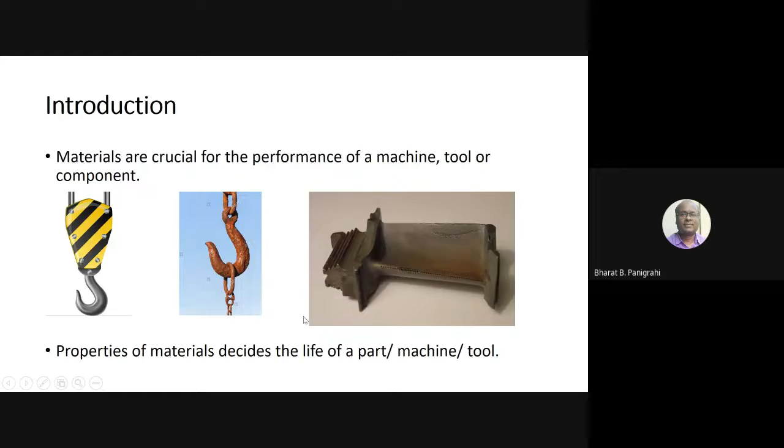You all know materials have different applications, and different applications require different kinds of properties. Not one single property is sufficient to meet all your requirements. Different functionality needs different types of characteristics of the material, and this difference in characteristic requirement leads to the development of a variety of novel methods of processing or novel materials. So high entropy alloys are one of this series which comes out.

When you talk about broad classification of materials, they can broadly be classified into three major categories: polymers, metals, and ceramics. When we talk about ceramics or polymers, each has its own properties that define its own application domain. Ceramics have definite properties - they are very hard, but they are not ductile. Polymers are typically soft and good for low temperature applications. Ceramics are good for high temperature applications; however, they will not have conductivity or ductility, which limits the application of ceramics.

Polymer properties being soft limits its application too. Similarly, when it comes to metals, they are ductile and conductive in nature. However, when exposed to high temperature, or exposed to an oxidative or corrosive atmosphere, we have issues. So when we talk about pure polymer based material, pure ceramic based material, or pure metal based material, each will have a different domain and area where it can be applied independently.

However, there are a variety of requirements where you also need high temperature resistance, oxidation resistance, but also need ductility. So you will have a requirement complex in nature. What happened then is that not one single category of material is made - so you develop something called a composite. You all know what a composite is, I need not explain it to you.

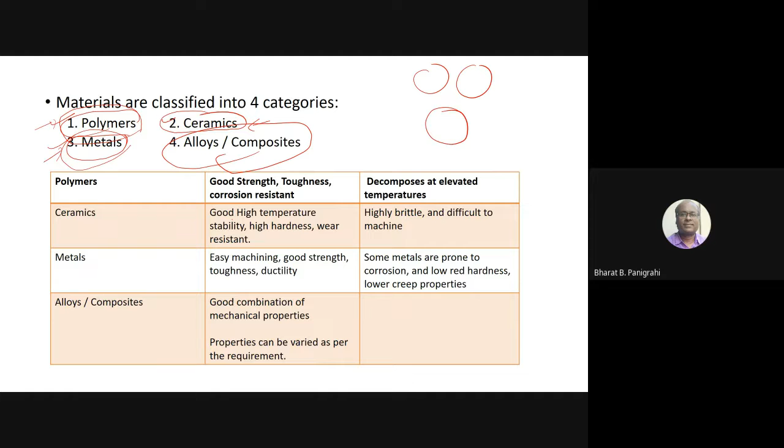So we will be discussing, within metal systems, a relatively new class of alloy which we call high entropy, which has come out here. Now, these are just like conventional alloys - they have a variety of properties and a variety of applications available.

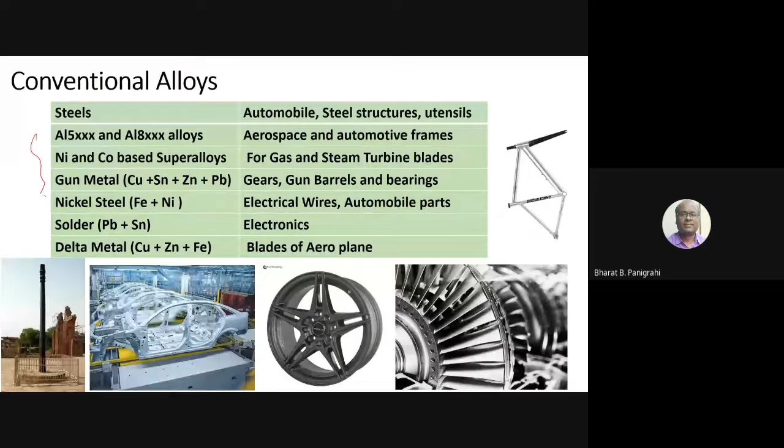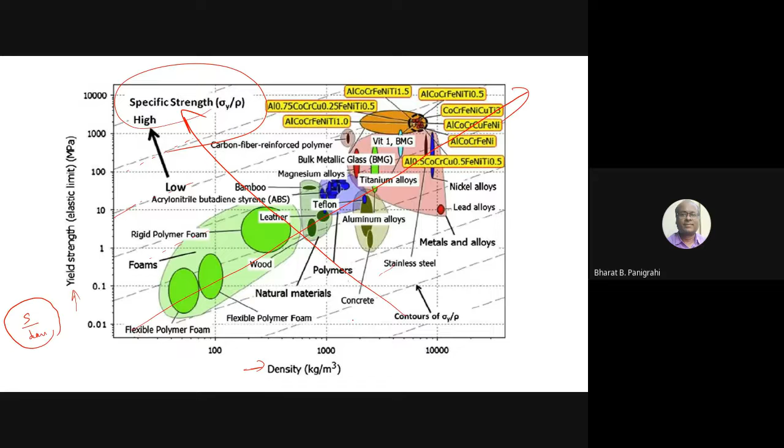So the demand for not only high strength material is high - of course you need high strength, but these days, especially for automotive or aerospace applications, you are not only looking for strength, but you want the weight of the material to be reduced. And that leads to a material property called high specific strength. So our actual requirement is going in this direction.

We want density to be low and strength to be high, which is not very easy to achieve. If you look at high entropy materials, these are a variety of materials - you can see polymer, foam, other things. What I want to say is all the conventional materials follow this trend.

The yellow portion, as you can see here, represents an upper portion of high specific strength. So high entropy alloys are typically a material with high specific strength. What it means is having a relatively lower density and a higher strength. This is where demand for them is increasing, so wherever you are looking for a high specific strength material, this is the class of material which can fill the gap.

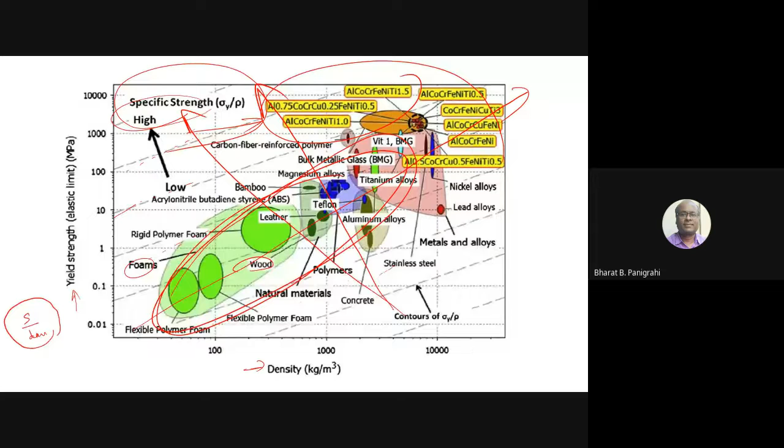There is a word used, entropy, and I don't want to bore you with it. These details of entropy will be covered by the next speaker when he does the thermodynamic modeling.

Whatever high entropy talks you will hear, most people will say there are a lot of elements you can add. However, most high entropy alloys you will find have somewhere around 4 to 7 to 8 elements, and you will see that their configuration entropy is very high. This is the class of material which we refer to as high entropy alloys.

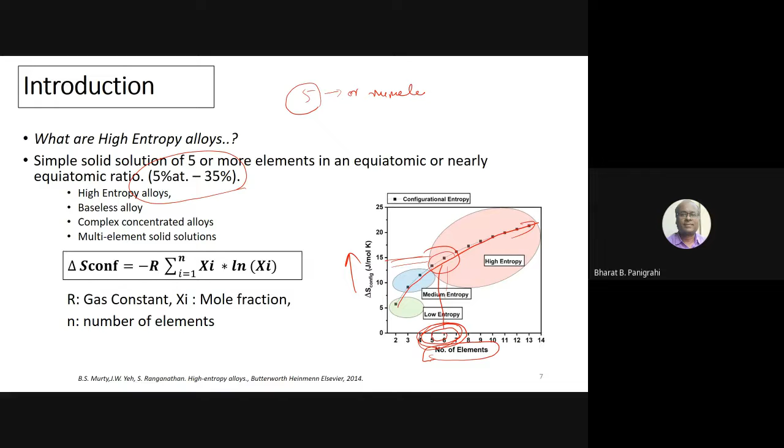So what does the alloy mean? We are having a variety of metals A, B, C, D, E - assume these are all metals. These metals are mixed together to make a single alloy, so it will have A, B, C, D, E in the alloy. This is our goal.

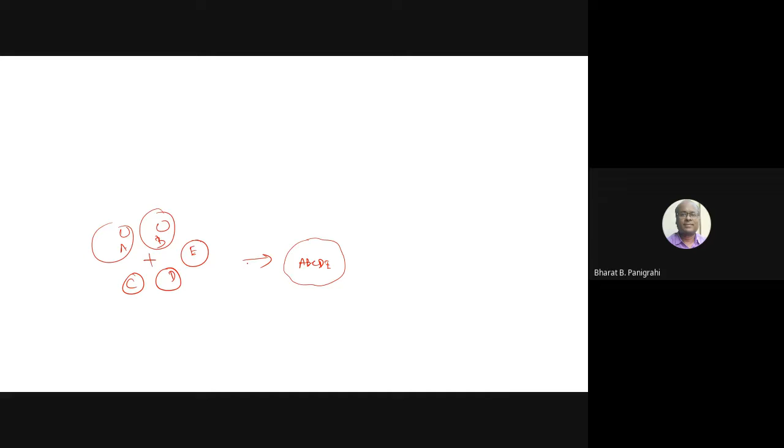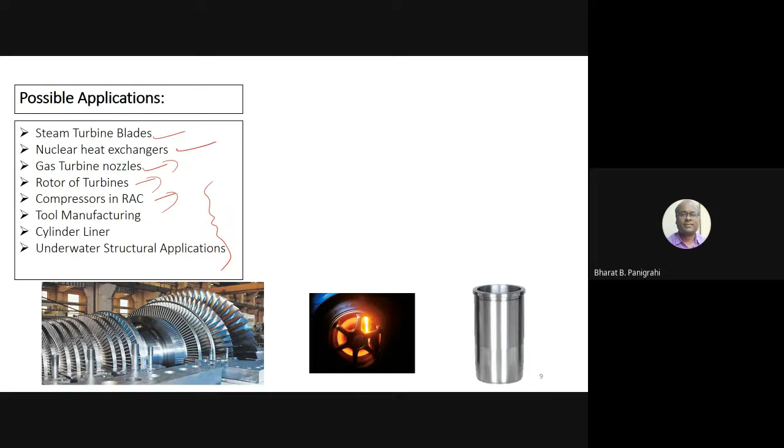There are a lot of applications you can find because they have very good hardness and good wear resistance, for example. Some high entropy alloys are also good in oxidation resistance. So you can find applications in a variety of areas - I've just listed a few, like turbine blades, heat exchangers, gas turbine nozzles, rotors, and a lot of other manufacturing applications. Since some high entropy alloys have good oxidation resistance as well as strength, they can also find application in underwater and structural applications.

There are a lot of desired properties, as I said. Not all high entropy alloys exhibit this, but there are a good number of high entropy alloys which give you good strength, good toughness, good corrosion resistance, good wear resistance, high recrystallization temperature, and controlled or low thermal expansion coefficient. So they can be used for several purposes.

However, in 2004 the actual breakthrough comes, and actual research in high entropy starts from a group led by Brian Cantor, which is in the UK, and another group led by Professor Yeh from Taiwan. In 2004, they published a paper independently, and from there the major attention across the globe comes from 2004 onwards. So this material is now almost close to 16 years old - it's a teenager. So there are a lot of scopes when materials are in their teenage years, huge scopes for anyone who is interested.

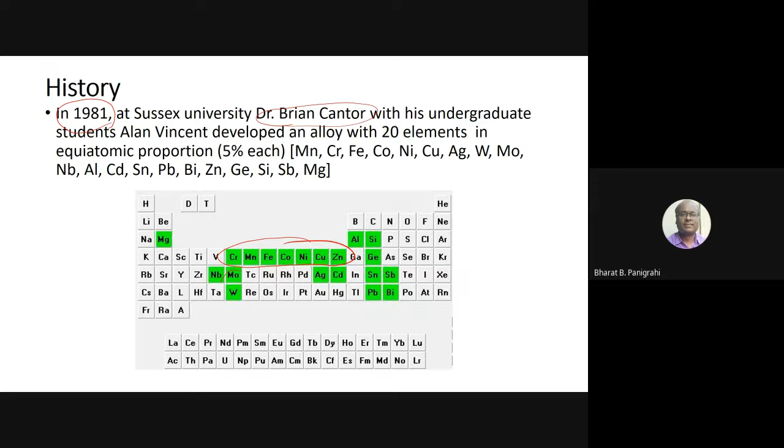If you look at the typical characteristics, there are 4 core effects that have been defined for this material. The first is called high configurational entropy - as I mentioned, if you are adding more and more elements, the configuration entropy increases. Since you are having elements of different atomic sizes, there is also what is called lattice distortion.

Lattice distortion means that now you are adding 5 elements and each element has a different atomic size. You can compare the size of A to the size of E, or to the size of B. Whenever you have a lattice, let's say this is a cubic structure. If it is ideal, everything is the same size, and you will see a very ideal cubic structure. But the moment you change the size at each corner, you will see there is a distortion on the crystal lattice. The next one is called sluggish diffusion.

This particular group is a little controversial. People have a lot of different opinions when it comes to diffusion. However, it shows sluggish diffusion. Typically, the reason people believe this material behaves as sluggish diffusion is that whenever you heat a material at high temperature, normally you see huge grain growth. All normal steels, alloys, titanium alloys, doesn't matter - at high temperature you will see huge grain growth. But in high entropy alloys, you will not see grain growth, or you will see extremely slow grain growth. That leads people to believe their diffusion is very sluggish, meaning slow. Where diffusion is high, you may expect high grain growth.

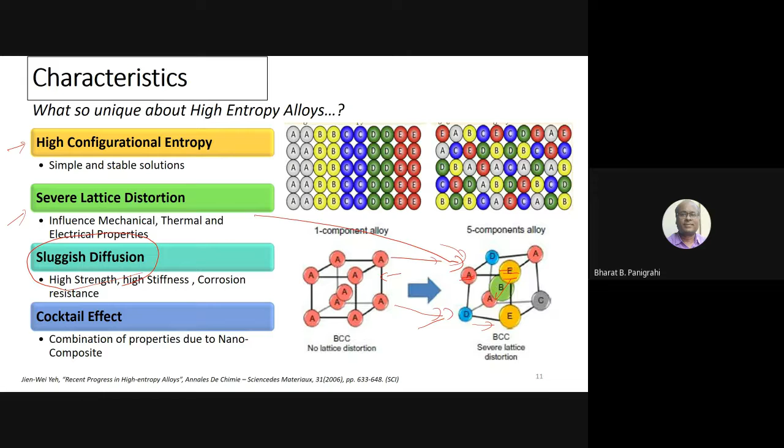There is something called the cocktail effect. This cocktail is a combination of various metals - A, B, C, D, whichever metal you want. Probably the combination of different properties coming from different materials can add up or exhibit multiple properties in one single alloy. So this is called the cocktail effect.

There are a lot of thermodynamic aspects involved. I am not going into that - just leave it.

When it comes to fabrication, it can be fabricated through the conventional route. The conventional route is basically the melting and casting route. You are well familiar with this - everybody is familiar with what melting route and casting route mean.

You can have a powder metallurgy route where metals are converted into fine powder. You prepare alloy powder followed by sintering. So it has powder, compaction, and followed by sintering, and this gives you the properties. We have a variety of sintering methods, and similarly we have a variety of melting and casting methods.

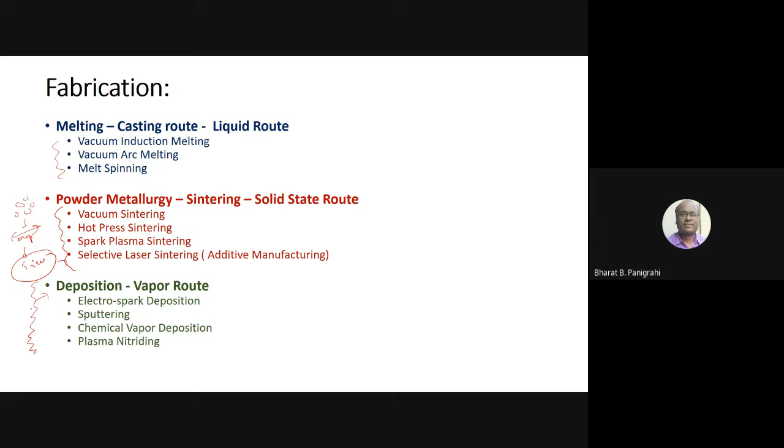This can also be used through the deposition method, which we discussed earlier, but there may be other deposition techniques. Material can also be synthesized as thin layers and coatings. By using alloy combinations, you can have a coated layer in the form of an alloy. So all three routes - melting/casting route, powder metallurgy route, and coating or deposition routes - are possible to synthesize this material or produce this particular group of alloys.

A typical powder metallurgy route consists of stages. Now I will talk a little more on the PM route, as I discussed earlier. For those not familiar with powder metallurgy, let me brief you. The powder metallurgy process consists of three stages. Those who are familiar, kindly excuse me, but there is a possibility people may come from different disciplines. The first step is making the powder.

Then the next stage is compaction and shaping. There is something called compaction, also referred to as shaping of the preform or component. The third step is called sintering, where the material actually gets its strength. So powder metallurgy has three different stages: powder making, then compaction and shaping, and the third stage is sintering.

In the present case, powder can be prepared through various techniques. You may be familiar with atomization techniques, and there is another technique called mechanical alloying process. For high entropy alloys, what we do mostly, and most reported powders are prepared through the process called mechanical alloying.

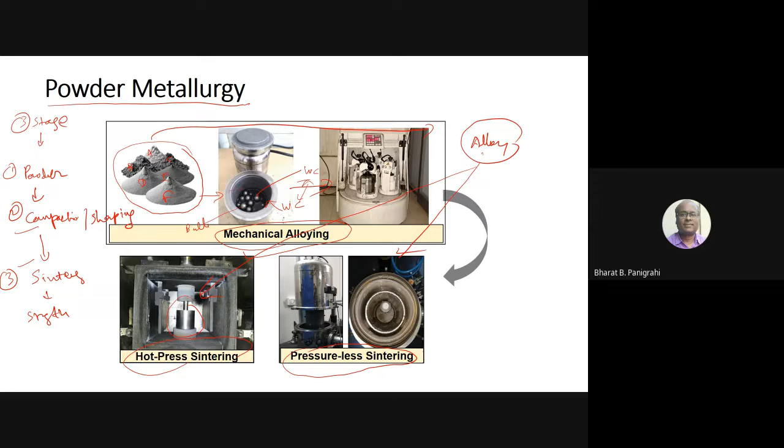We involved both kinds of process here. Both has their own advantages and disadvantages depending on what kind of component you are producing. Process can be taken. So this is brief about production of the high entropy alloy powder, which our lab basically involves a mechanical alloying route for making the alloy powder.

We work on a variety of high entropy alloys, not only one composition. There are different aspects of work when we talk about high entropy alloys. One is understanding the diffusion and densification mechanism. Understanding diffusion mechanism is a very big thing, because we have a large number of elements. We need to understand how the diffusion of atoms is taking place.

Then how to achieve high density. For making a component, you need to achieve high density. There are different ways we try to evolve. Not all powders are good in sintering. Let me be honest, you need to really optimize the process. You find ways how you can enhance the densification. Enhanced densification means how you can reduce the porosity or defects inside the component, so that mechanical properties can be better and better.

So that is one aspect, purely on how to enhance the densification, which can be done through solid state sintering as well as liquid state sintering. So we also employ both techniques, called solid state as well as liquid phase sintering, to get a much denser microstructure.

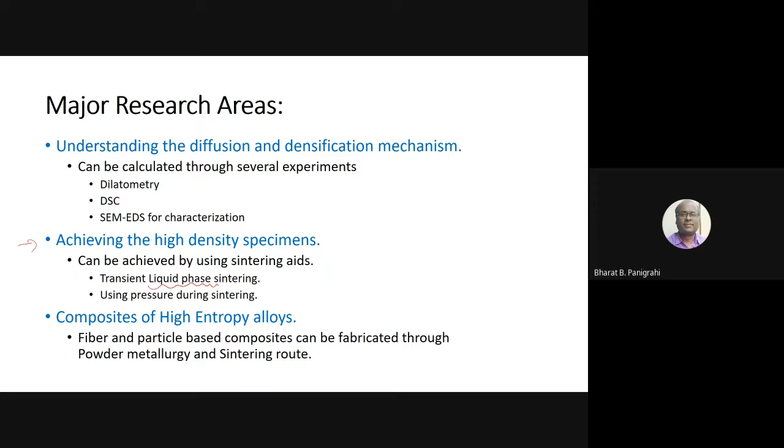Third aspect is what we are dealing with here: making a composite of high entropy alloy. Using a composite, we use high entropy alloy as one of the phases in the form of matrix. In another case, we are also using it as a reinforcement. So these are three major aspects which we are working on: development of alloy and understanding the diffusion behavior, achieving high density, and of course talking about their properties evolution, all sorts of mechanical properties. And the third one is trying to develop some composites based on high entropy alloys.

I'll just tell you an example how you can achieve high density through pressureless sintering, in this particular composition of high entropy alloy, which is a 5-element equiatomic alloy, where we have aluminum, cobalt, chromium, iron, and nickel. These are the constituent elements of that alloy, which is 5-element in equal atomic compositions. This alloy is prepared through the mechanical alloying route, and after the alloy is prepared, we study their chemical behavior and phase evolution.

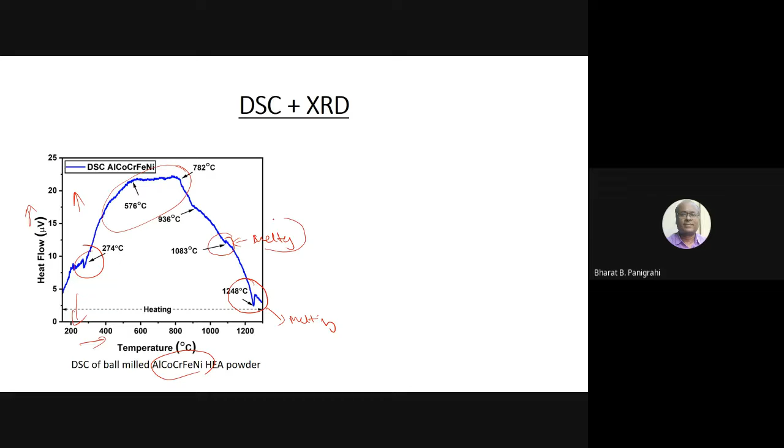Similarly, here also you will find certain endothermic peaks. That means some fraction of alloy is actually melting. So all the melting peaks come in the form of endothermic peaks.

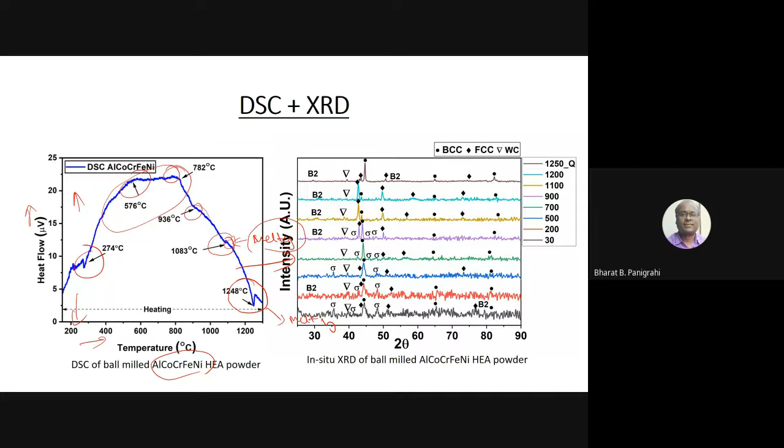We have taken some values, and you can see the changing diffraction profile and phases as you move from bottom to top - there is a huge, gradual change in diffraction profiles. Whenever a gradual change in diffraction profile is happening, it indicates a slight change in the phase composition.

I'm not going into detail of each peak. What I want to bring to notice is that with changing temperature, the phases are changing - new phases are forming, some phases are vanishing, some new precipitates are forming. You can characterize all this using X-ray diffraction, and see the corresponding signal at various temperatures using the DSC.

There is another technique called dilatometer, which essentially tells you that as you keep heating the sample, you will see a huge shrinkage here - this is the sample. You do the compact. Dilatometry is used for thermal expansion measurement. So you have a powder which you make into a compact, or pellet, and when you heat this pellet, the material undergoes expansion and shrinkage.

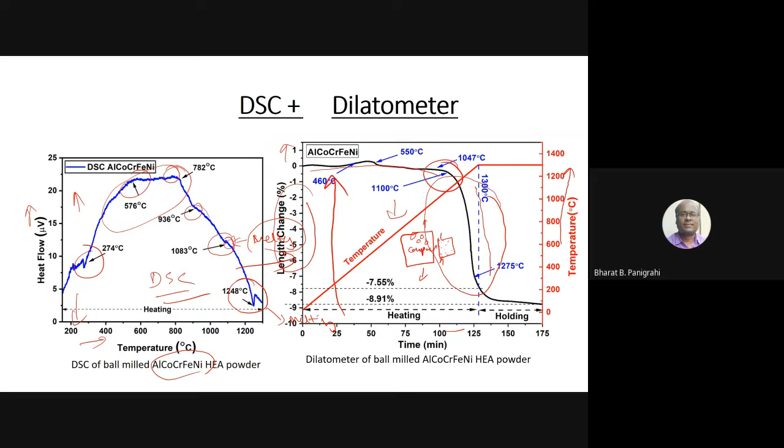If the material has to be sintered, that means you are going to see shrinkage. Sintering leads to shrinkage. When the green compact is heated, you will see that at a temperature of approximately 1047 degrees or 1045 degrees centigrade, the shrinkage occurs - this is the length change. The y-axis is the length change, downside is shrinkage, upside is expansion. This is the region where you see huge shrinkage happening, meaning major sintering of the material is happening in this particular temperature range.

I'll show a little more detail. If you overlap DSC and dilatometer - this is the DSC profile, this is the dilatometer - you can notice the events: small melting, large melting. You can see that when the melting starts, the shrinkage also starts. This tells us that this particular alloy undergoes liquid phase sintering - the moment liquid is formed, densification kicks in. This proves that this particular alloy actually goes through liquid phase sintering.

If you look at the microstructure - since we're more interested in microstructure, as I mentioned earlier - you quench the material after heating it to a certain temperature. Whenever you quench at different temperatures, let's say around 800 degrees centigrade, you can see the grains are unsintered - very clearly grains are there. But if you heat it to a high temperature, around 1200 degrees centigrade, you will see these grains, and the white phases you see are basically an indication of wetting of the surface by the liquid phase. It's like something dipped in liquid, and after dipping you will see the liquid is there - you can very clearly see the liquid has been quenched.

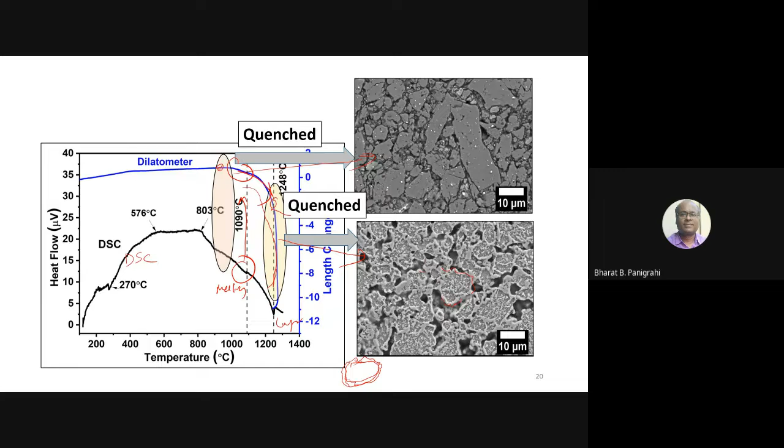When you quench it, it is frozen as it is, and you can see around the grains, liquid droplets have frozen on the surface. So the grains are wetted by whatever small portion of liquid is formed. You are actually able to capture the liquid phase here. So it says that liquid started forming at that particular temperature, and when you allow proper time, this leads to massive densification.

These are different temperatures. You have quenched the material at 800 degrees Celsius, and you can see pure, no sintering at all. At 1000 degrees, there is a little bit of sintering, grain coarsening, everything. But at 1200 degrees centigrade, you will see that some fraction where liquid started forming.

This is a quenched sample, just when liquid started forming. The white spot you see is the region where liquid starts. You can see that hazy structure when the liquid phase appears. At high temperature, you can see very clearly at 1250 degrees that a good amount of liquid is formed and has wetted all the grains.

So you can actually capture this event by looking at what is happening in the shrinkage side by dilatometer, what is happening in the thermal profile in the DSC, and what it exactly looks like you can see in the SEM. So SEM, DSC, dilatometer, and XRD can together tell the complete history of the changes happening in your alloy.

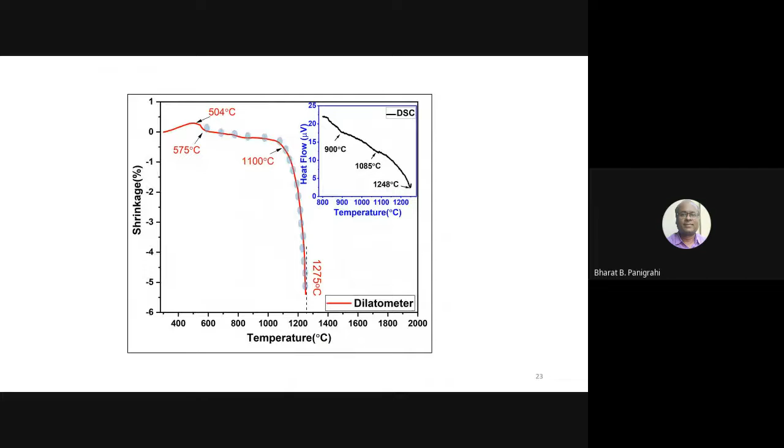Okay, so this I have already explained. To understand further, which may not be of much interest to you, there is something called kinetics of shrinkage. So kinetics of shrinkage involves a lot of modeling we do.

What we basically do, when we talk about sintering kinetics, is try to identify which particular diffusion mechanism or sintering mechanism is acting for densification. There are a variety of sintering mechanisms, as you all know. In this case, I have shown that this particular alloy has a liquid phase forming. So liquid phase forming means the viscosity of the liquid which has formed plays a huge role. To understand that, we have characterized the viscosity of various elements.

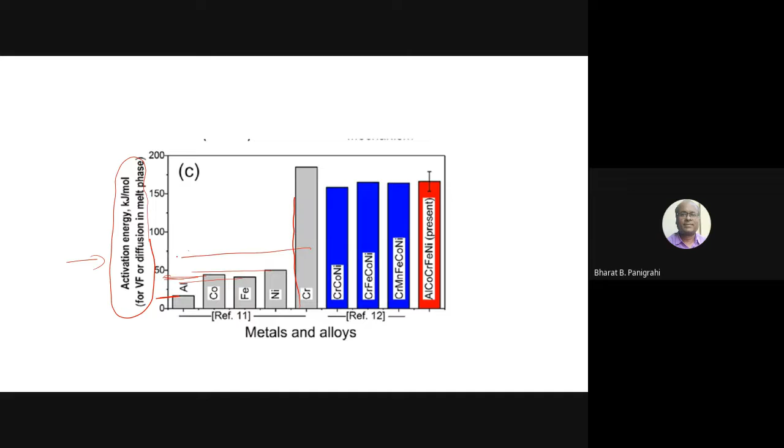Some of this data has been taken from literature. This is the coefficient of viscosity, activation energy for viscosity. For aluminum, if it is liquid aluminum, this is the viscosity value. If it is liquid cobalt, just at the melting point of the metal, these are the viscosity levels. For chromium, if you have the pure element as a liquid phase, it has a coefficient of viscosity with activation energy somewhere here. These are the three blue lines.

What you see here is for the high entropy alloy, when it forms near its melting point, it has viscosity in this range, and its activation energy of viscosity is in this range. And in our alloy, shown in red, when you measure the coefficient of viscosity, it exhibits activation energy in the same range. This confirms that whatever phases we are predicting, the liquid phase which has formed has a coefficient of viscosity exhibiting the activation energy reported for this high entropy alloy. So this is another way of confirming liquid phase sintering in our alloy, where the viscosity of our alloy and the reported alloy are nearly in the same range compared to their base element.

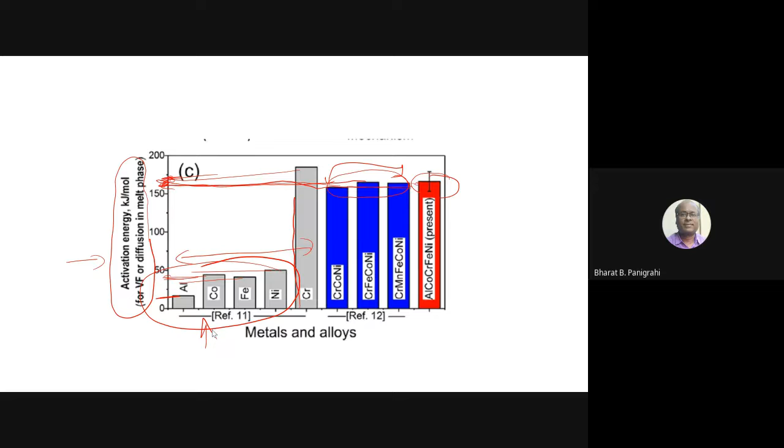The base element has much lower viscosity. So this does indicate that this alloy is melting as a whole and forming a liquid which has a viscosity altogether completely different compared to its base element. This also gives a very important conclusion about the viscosity of the alloy phase versus the viscosity of the independent element.

There are a few more things. We have some other alloys, for example another composition containing silicon. What we are doing is, silicon is extremely hard and has very high strength. However, it doesn't have ductility. The problem is, our goal was basically to improve ductility while exploiting the strength of this material.

So basically what we wanted here is to take this particular alloy and use a soft phase to provide ductility. Here we have used pure nickel as the soft phase, which is expected to provide ductility, while strength comes from the high entropy alloy phase. So this is basically a two-phase mixture we are designing so that you can have both high strength as well as ductility. You will see the properties. This is a typical powder metallurgy route, nothing wrong in that.

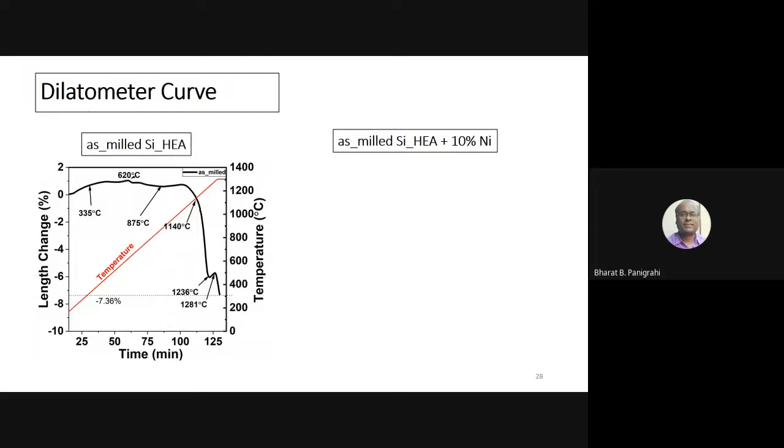These are their typical profiles, so you need not worry about that. The most important part I want to show is the density. We have a pure high entropy alloy, silicon high entropy alloy, and we've added 5% nickel powder in one case and 10% nickel powder in another. We compacted and sintered them, and their sinter density is more or less in the same range of 96 to 97%.

When you look at their hardness, since nickel is a softer phase, you might expect a change, but the hardness does not change drastically because the base alloy is already a harder phase. The hardness is retained without really compromising it.

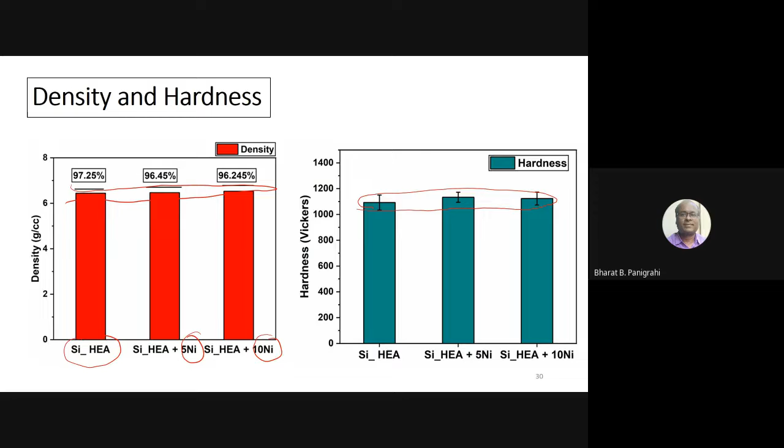But if you add 5% nickel, we are able to jump the strength to almost close to 3. By having 10% nickel, we have crossed the strength to 3 gigapascal, 3000 megapascal strength. You can imagine how you can tailor this material to design an ultra high strength material. You can call 3 GPa strength ultra high strength material—it's very rare to get a material with that kind of strength.

So what we are doing here is simple: you have an alloy made through mechanical alloying, which gives a nanocrystalline structure. This nanocrystalline structure has very high strength and very high hardness. By adding nickel, we are providing a softer matrix. So there is a combination of high strength phase and soft matrix, which has led to a massive combination for designing a material with ultra high strength.

You can see the strength reaches 3 gigapascal—you will never find such high strength in an alloy normally, it's very difficult to find. So what I'm trying to say is such alloys have extremely huge application or scope where you can design a high strength material.

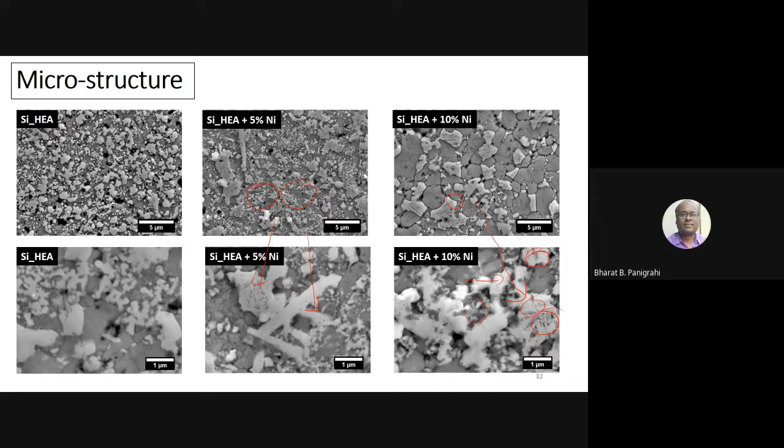These are simple microstructures. If you gradually increase the magnification, at high resolution you can see a lot of fine structures are formed. By adding the nickel, a huge amount of fine structure forms. Under the microscope, you have huge lamellar, needle, and fibrous structures. This formation of fibrous structure and fine needles—basically nano needles, you can call them nanorods—huge amounts of these nanorods and fibrous structures have led to a massive jump in strength. It's a very simple technique, but very effective for designing an alloy with very high strength.

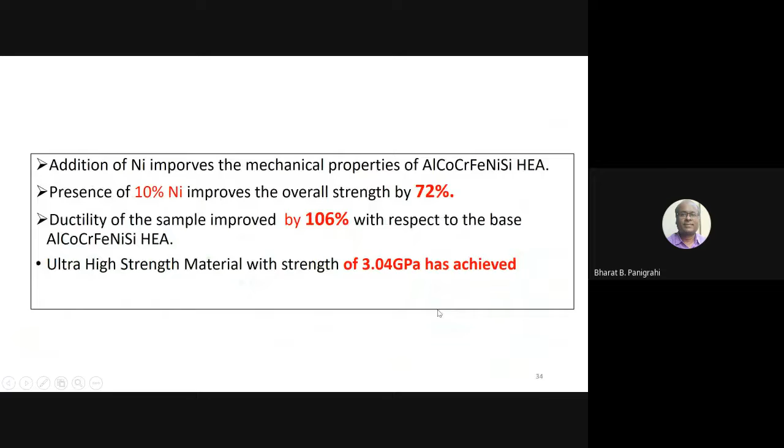These are more details anyway—chemical analysis. So what we want to say here is we have designed an alloy with very high strength.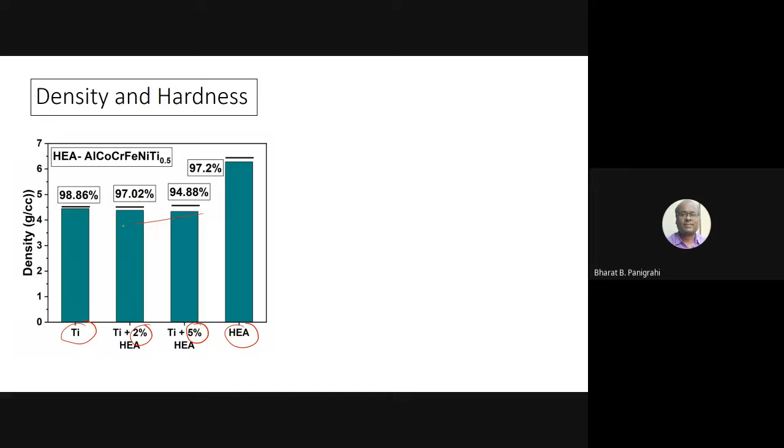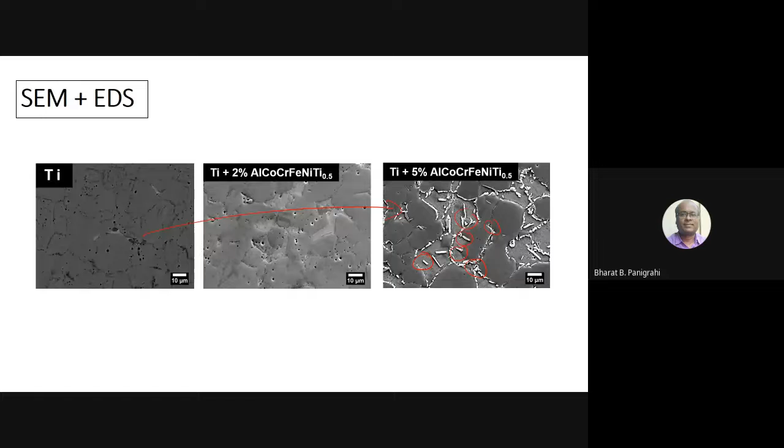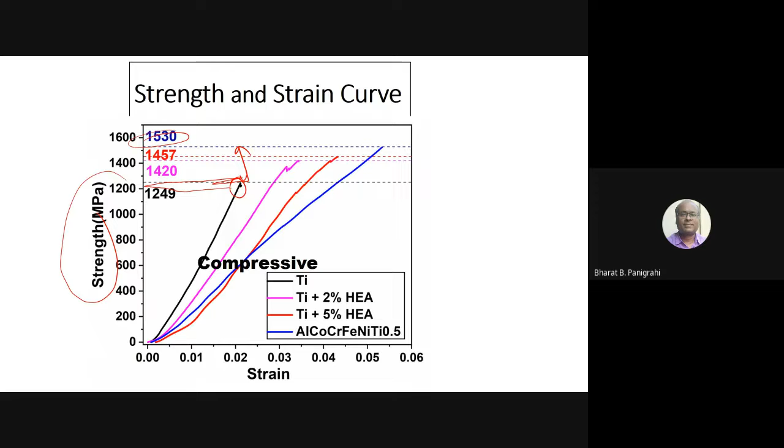Okay, we go for detailed analysis. If you look at compressive strength, there is a gradual change in it. The compressive strength of pure titanium is somewhere close to 1200, but this can jump to almost 1500 MPa by using the high entropy phase. So there is a massive jump from 1200 to 1500 megapascal by using just a small quantity, 2 to 5%, of high entropy alloy. So these alloys can also be used. If we increase this composition, the property will probably jump further. We just wanted to show that even a small fraction of such high entropy alloy can end up giving a high strength material. This is a case study of titanium, for example.

Apart from that, when it comes to high entropy, various categories of high entropy materials have come up. High entropy has led to categories called high entropy nitrides, high entropy oxides, and similarly high entropy borides. So a variety of high entropy ceramics has come into the picture, and these are extremely hard and very high temperature materials. This tells us that this category of material, high entropy ceramics, can replace conventional ceramics and oxides for many high-end or extreme environment material requirements.

So with that, I want to tell you that high entropy alloy material is extremely useful. It has been coming out for hardly 20 years, so huge scope is there in all aspects of material development: melting route, casting route, powder metallurgy route, deposition route. When it comes to properties, a lot has yet to be evaluated. Their fatigue behavior is not well understood, their creep behavior is not well understood. Whatever studies are available are very limited, and those who are interested can find huge scope in this material to work on. There's a lot still to dig up, and as people across the globe are working on it, I'm sure you will find a lot of interesting things coming out in high entropy alloys.

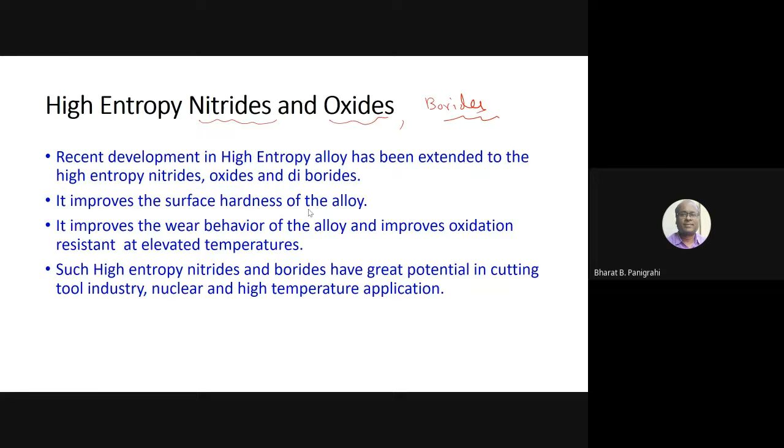Ravi Shankar sir, you can ask the question, sir. Yeah, directly. Ravi Shankar sir. Ravi Shankar sir. Yeah. Am I audible? Voice is not clear, sir.

Yeah, I just want to know what will be the price of the equipment. Pardon? I am not able to understand. Yes, I would like to know the price of this, you mentioned, for the dilatometer. So I would just like to know. Are you talking about equipment price? Wait a second, you have to type. Let me check. No, I can't see. You are talking about the price of a dilatometer equipment, or the price of a running cost?

So price of equipment varies, two aspects are there, sir. One is the temperature, which will decide... there is a huge disturbance, I don't know from where it is coming. Ravi Shankar sir, there was a disturbance in your voice. Ravi, can you mute? Sir, I understood the question. Can you mute? Yeah, can you mute? I can answer. Can you mute?

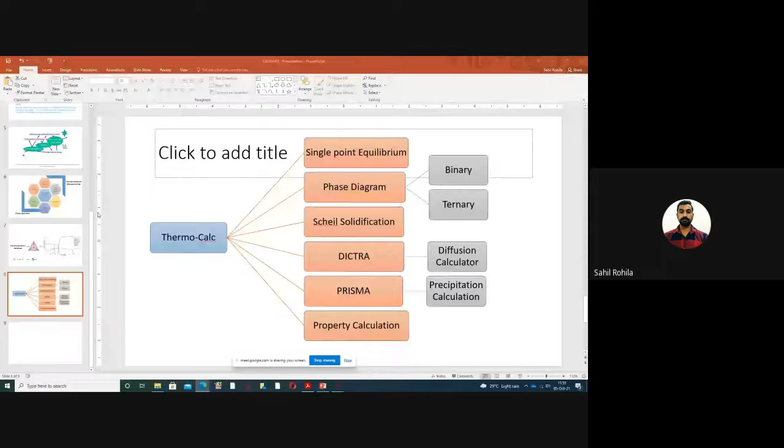Okay, thank you. So I am Dr. Sahil Rohila. I have just recently completed my PhD under the supervision of Dr. Bharat Bhushan Panigrahi at IIT Hyderabad. So today I'll be showing the CALPHAD techniques and Thermo-Calc for high entropy alloys, which are both recently new techniques.

The CALPHAD technique is new, and high entropy alloys as a technique is also new, so it has a really great future. If any student would like to pursue this, I request that they pay attention, and if anyone has any question, they can interrupt me anytime. Okay, let's start.

As one of you asked, how do you get to know regarding the phases, FCC or BCC? If we move through experimental techniques, there are several experiments we have to perform, such as XRD, TEM, and diffraction, to understand whether the phases are FCC or BCC. But now, using computational techniques, first we can decide which phase we want, and depending upon that phase, we can select the composition, and then go into fabrication of the alloy. That actually saves much effort.

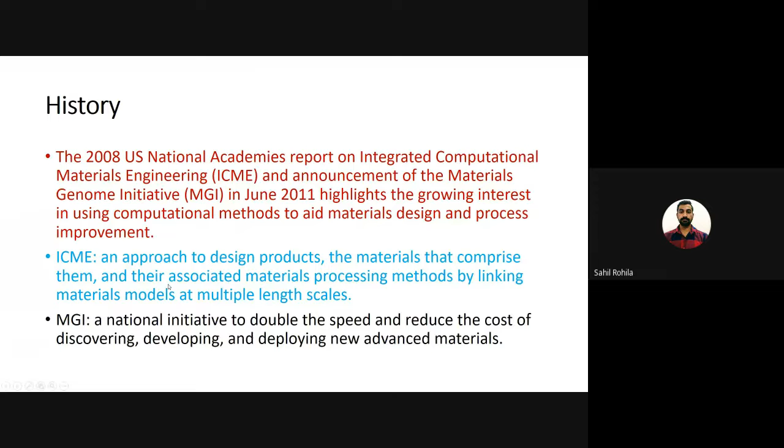So, history of this CALPHAD technique: it just recently started in 2008 by the US National Academies. They reported on the Integrated Computational Materials Engineering and announced the Materials Genome Initiative in 2011. These are just the definitions of what exactly ICME and MGI do. So, CALPHAD is actually an initiative of MGI and ICME only.

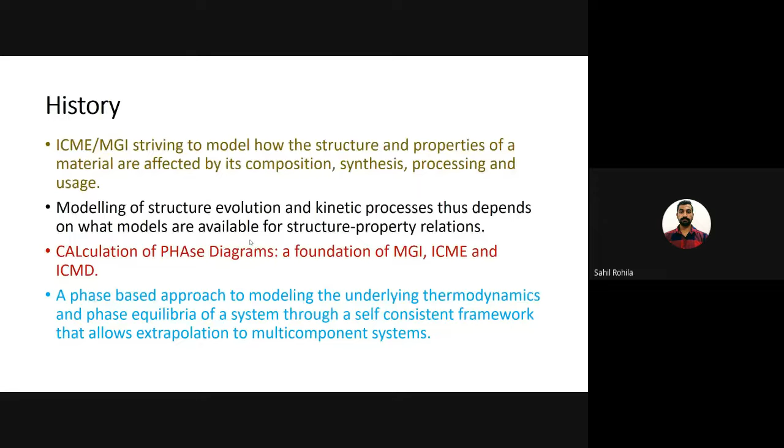CALPHAD is calculation of phase diagrams, and calculation of the phase diagram can be done through various ways, through molecular dynamics, Monte Carlo methods, and other methodologies. And Thermo-Calc is one of the software which actually provides easier help to follow.

So now these are the basics of the simulations. First, we do the first principle calculation. First principle calculations are calculations based upon mass, charge, or electron spin. We get to know the position of the electrons, how they are behaving, what kind of spins they have, and how their bonding will be. These are the first principle calculations, which are the base of all simulation and computational techniques.

Then it comes to the higher scale, that is CALPHAD. In CALPHAD, we get to know how different molecules are behaving with each other. If we are forcing, for example, aluminium and scandium together, how they will behave, how they will form like BCC, FCC, or Laves phase. That is CALPHAD, the higher version from first principle calculation in the length scale.

Then the next version, if we move forward, is the phase field methodology. Then our area also gets bigger. For a bigger size area, we get to understand how the minimization of energy happens, how entropy and enthalpy will behave, and how precipitations will occur. That we get to know from the phase field methodologies. And the next step is using the finite element methodology.

Above phase field, this is finite element methods, where we can get to know about the failures, how the materials is failing if we put some kind of pressure on it or give different types of loading. So this is how the computation starts from the very low scale to the higher scale.

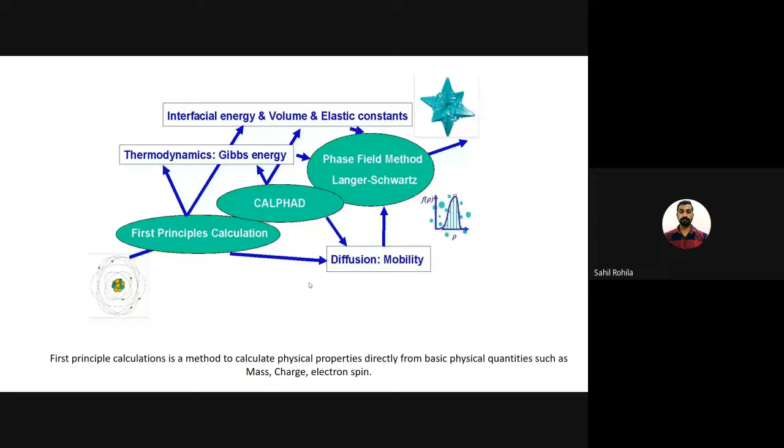First principle calculations, CALPHAD, phase field modeling which consists of Monte Carlo or other methodologies, and then ANSYS and Abaqus we usually use for finite element methodologies. So these are the main things which ThermoCalc provides.

ThermoCalc actually works on the minimization of Gibbs free energy, which is a function of x, the molar fraction, T is the temperature, P is the pressure, and N is the number of elements. So in this we can do two types of major calculations.

One is thermochemical measurements, in which we can calculate the enthalpy of formation, entropy at any time, heat capacity such as specific heat capacity, Cp and Cv, and activity. The other thing we can perform is phase equilibria, to get to know the liquidus temperature, solidus temperature, and how many phases are stable at a particular time.

ThermoCalc has a thermodynamic database, which is based upon experiments performed in the past. It consists of all the results from those experiments, and then we use ThermoCalc, which extrapolates using that thermodynamic database.

For example, point A is there, B is there, and D is there, but point C is unknown. So ThermoCalc has the database of points A, B, and D. Based on that, it will extrapolate and get to know point C. This is the very basic principle of how ThermoCalc exactly works.

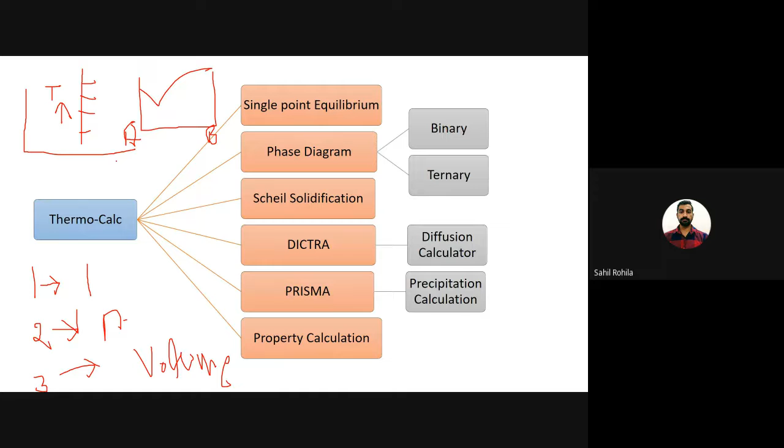But if the number of elements exceeds 3, how can we process those things? In that case, we actually make a pseudo binary phase diagram. For example, we have elements A, B, C, D, and E. So how do we obtain the phase diagram now? Because it is very difficult, what we will do is fix the composition of 3 elements at a point and make a pseudo binary phase diagram.

That's A and B, while C, D, E are fixed or constant. Then A and C, A and D, similarly A and E. We'll actually make phase diagrams of all the possible elements and then combine the results and get the data. Just similarly B and C, B and D, B and E. So these are the phase diagrams that we can make through ThermoCalc.

The other is the Scheil solidification. Scheil solidification is based upon the Scheil equation, so it uses the same approximations and assumptions while computing the solidification.

Another module of ThermoCalc is DICTRA, which is for diffusion calculation. For example, take the iron carbon diagram, or any case you can think of. In case of iron carbon, I want to see how things change if temperature is stable. Say I give it a 300 hour time frame - how will the carbon or ferrite boundary change with time? That we can process through DICTRA.

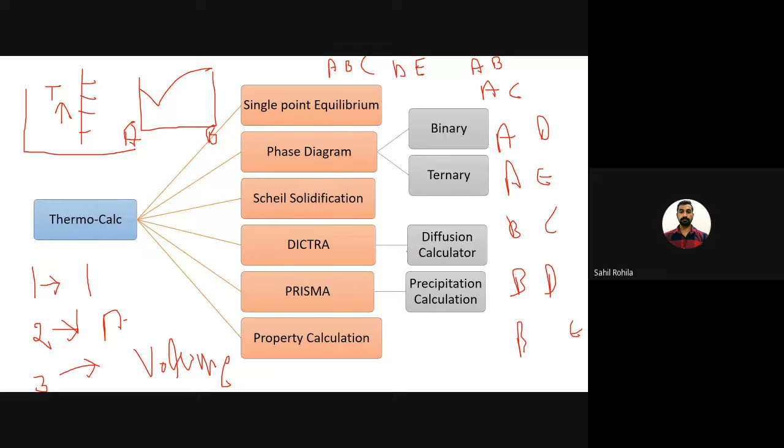The other is property calculation. Property calculation is something we can actually obtain from all of this. So we'll see now.

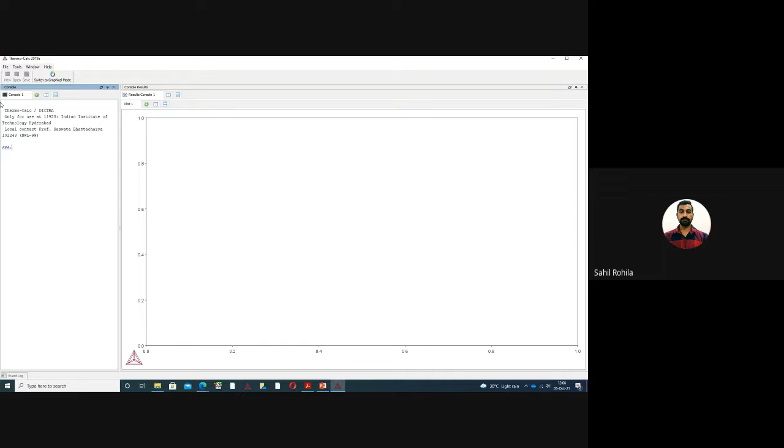ThermoCalc provides two basic modules. One is the graphical module, the graphical user interface, GUI. The other is the console mode. In console mode, we have to write programming code, just like Python, and we can import that code into MATLAB to use the results obtained through ThermoCalc with our own manual user-defined functions. So I'll use the graphical user interface so that you can observe clearly.

So let's start from the very basic - the single point equilibrium. Okay, so now you can see the configuration pane has changed. A periodic table has appeared here, and we'll see what type of calculation we can do.

First I'll do a calculation for a 2D binary alloy, and later I'll expand it to a high entropy alloy. For example, just as I explained in the first slide, we have to select the database first. It uses an experimentally available database.

So I'm using this iron carbon database only right now - I have already selected iron and carbon. Here in this pane, I can give input based on mass percent, mole percent, mass fraction, or mole fraction. I will prefer inputs from you actually, so if anybody can unmute the mic. Right now I'll go for mole percent.

So please let me know how much carbon you want in the alloy. 5%? Okay, let's go for 5%.

So on the next page, I have to select the temperature. What temperature shall I select? At what temperature do you want exactly the equilibrium condition? 980 degrees centigrade. Okay, 980 degrees Celsius, very good. Now I'll just go with perform tree.

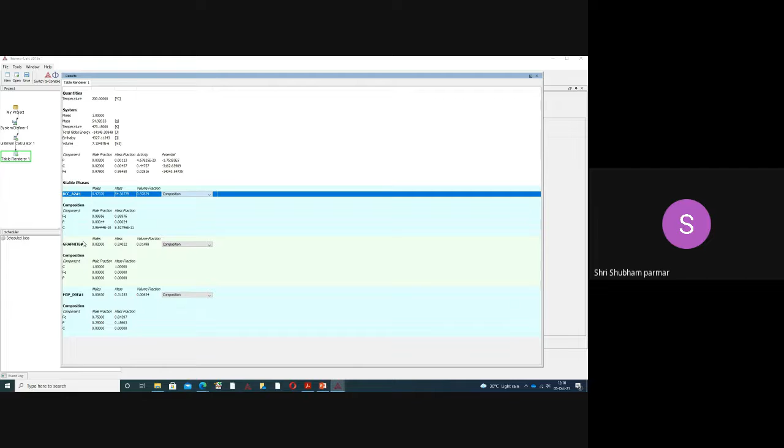Yes sir, so graphite. It is showing now graphite. But have you ever seen graphite in the iron carbon diagram?

Because it is cast iron, so here graphite may be there, no? Yeah, but mostly graphite is unavailable. Very less amount of graphite, yes, sometimes present. But cementite is the thing, that ferrite... cementite, actually, yes, we need cementite, and we observe cementite a lot in this iron carbon diagram and the steels.

Excuse me sir, but the carbon, what percentage have you taken? It is representing the cast iron. Exactly, 5% carbon you have taken. So carbon contains the graphite. Yes sir, right now the carbon percentage is 2. So let's even make it 0.5. Will that be fine? That will be fine.

Still we are observing graphite. So the main thing, actually, it is doing the global minimization. If I'll show you, yeah, here.

So this is the metastable equilibrium. Cementite is usually at the metastable equilibrium, and graphite is the main equilibrium. So it is giving the global minimization.

So in case I want to check, because there will be many types of alloys where the complete equilibrium will not reach. So in the steels, cementite will transform to graphite, but the activation energy is so high it will not reach graphite, but it is giving us a little different information.

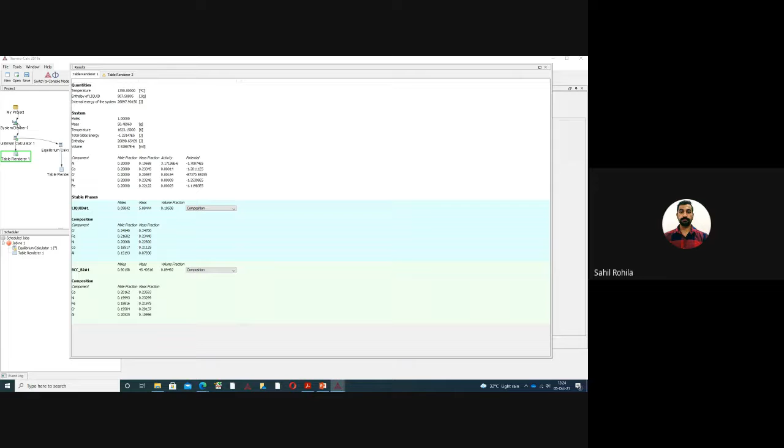So now I will move forward to binary phases and ternary phases, how to develop phases by using Thermocalc. Will that be fine if I move forward? Okay. So I'll calculate the phase diagrams now. Yes, sir.

Before going forward, I'll actually delete all these past activities, so that we will not get confused. Remove. Okay. So first thing, the selection of the database.

I'll select, for example, now I want to check the phase diagrams of aluminum. I'll select the aluminum database. Aluminum, I want to check its phase diagram with scandium. I don't know how it will behave. I'm giving randomly that at scandium 10 mass percent or mole percent, how the things will change.

So I'll go to the equilibrium calculator, and in phase and phase constitution, I'm giving freedom to all the phases, so that all the phases can get stable. I'm not providing any limitation on whether this phase should be there or not. I just want to check randomly because I have zero idea about aluminum and scandium, how the things will be. So I'm giving freedom to all the phases.

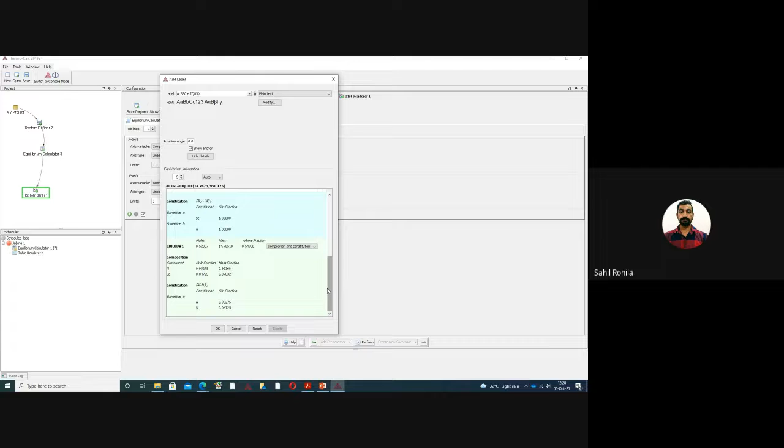And even if I go and right click over it, add label, show details. Now at this point, I can observe, and I'll select composition and constitution, same here. So my system is at 14.28 mole percent scandium at 950 degrees centigrade. What other phases will be there? One is Al3Sc with a molar fraction of 0.47, the other phase that I have is liquid at 0.52. So it will tell me at which point how much of which phase is present. If I say okay, it will just write it here.

If these things are clear, that's how to use these basic things. And in plot render, this is a legend style.

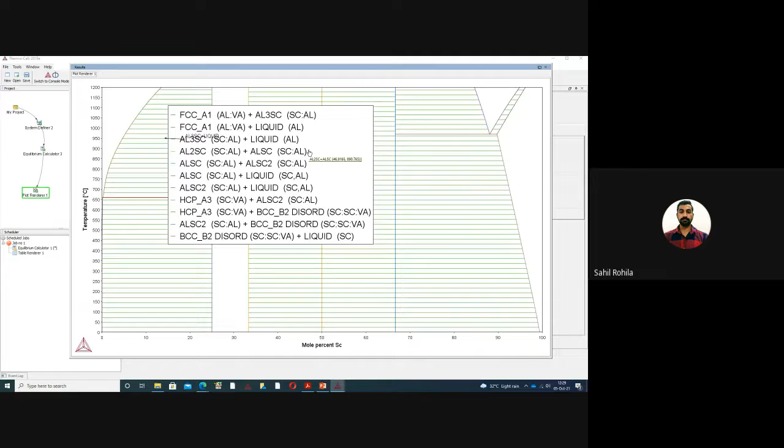Legend style is none. If I provide all, it will give me all the proper information of the phases here. Now you can see, it will give me FCC phase is there, aluminum based plus Al3Sc, what if HCP phase is also possible, plus with BCC disordered phase, and these blue, violet, yellow color lines are showing that particular phase. For example, I'll do this, double click on this, right click, properties, I'll increase this width.

Now we can see HCP is this color, so which is this. So here we are obtaining HCP at, double click the point, sorry, right click, add label, show details. At 90 mole percent of scandium, we are observing HCP phase.

So this is the binary phase. Now how to calculate the phase diagrams of high entropy alloy? So we'll go back to system definer. So the first thing was selecting the database. We'll select the database of high entropy alloy.

We'll select any alloy, for example, cobalt, chromium, iron, manganese, nickel. High entropy alloys are the simple solid solution of 5 or more elements in equiatomic or nearly equiatomic proportions. So I'll provide. How many are there? 1, 2, 3, 4, 5, 6. I'll reduce it, I'll use 20, 20 each.

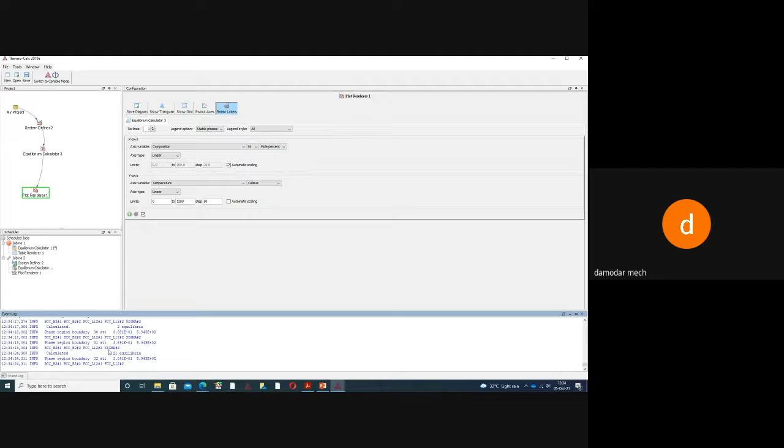Sir, you are having time up to 12:45, sir. 12:45. Okay, so we have very less time. Still, your requirement, actual time up, we need to complete by 1:15. But the session was started early, so I told you 12:45.

Okay, so phase diagram is one of the important things in high entropy alloy. That's why I just directly jumped on the phase diagram. Even in between that, there is a property diagram also. Okay, we'll see the phase diagram first, and hopefully I'll discuss more about phase diagram, and then we can complete the session. And if anyone has any doubt, they can contact me anytime via email.

So I'll be happy to help all of you. And meanwhile, the phase diagram is getting computed, they can ask their queries, questions, or something like that if they have anything in their mind.

So even if it is not related to ThermoCalc, even if it is related to high entropy alloys, powder metallurgy processing, or any such question, if they have, they can ask. I'll be happy to help if I can. I'll try to help.

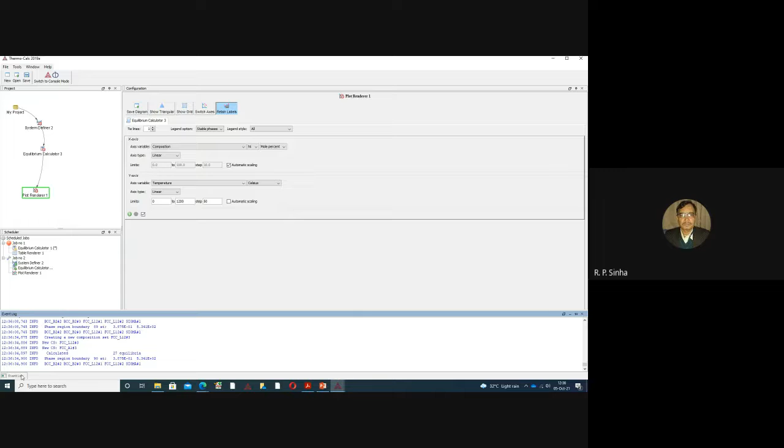May I know the name of the software and how it will be available to us? The name of the software is ThermoCalc, based on thermal calculations. You can download it from its website. They provide a few databases for free, demo databases, and using those you can calculate so many things. You can do diffusion calculation, calculate precipitation. For example, in aluminum alloys we can get this precipitation. Okay sir, I understood. Now you go ahead. Thank you.

So calculation of a phase diagram is actually a lengthy process because it has to compute so many databases and data points. I really wanted to show you a phase diagram, but it is taking time. I'll show you one of my own, just wait.

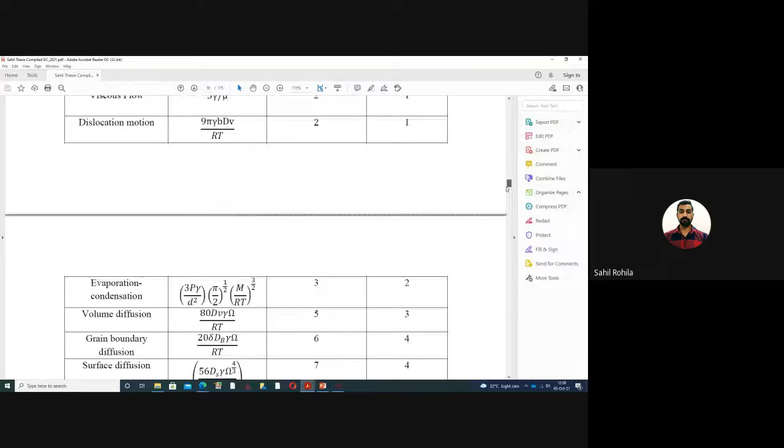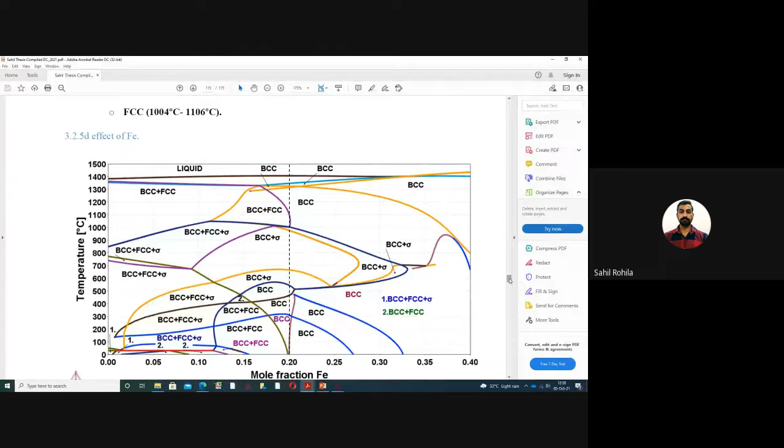So this is the type of phase diagram for high entropy alloys we get. This is for one condition. For a high entropy alloy, we actually have to process so many phase diagrams. I should just wait.

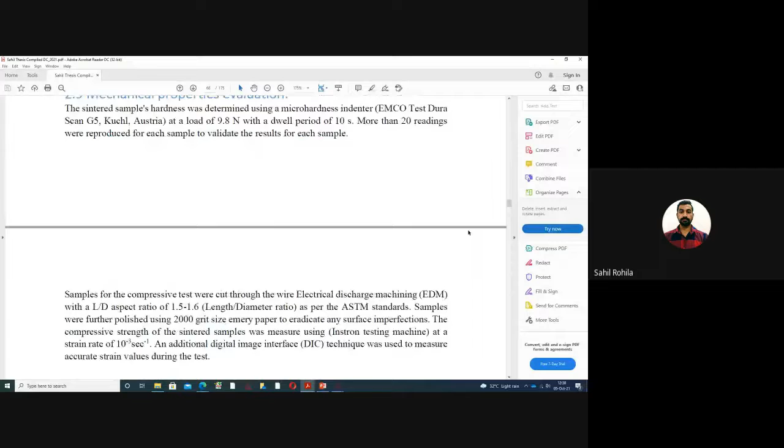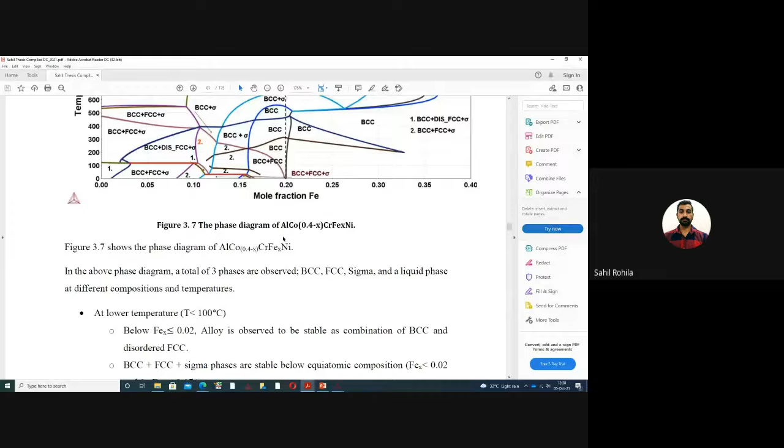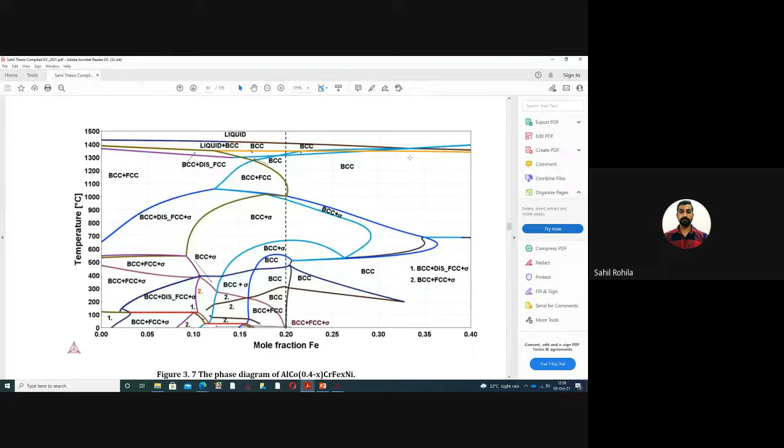So this is for aluminum, cobalt, chromium, iron, nickel. For this, we actually have to develop nearly 22 phase diagrams to get to know how the phase will evolve with time. Here we get to know the mole fraction of iron, and cobalt. Cobalt is a dependent variable, iron is an independent variable, and the composition of aluminium, chromium, and nickel are fixed, and we get to know how the phase will evolve with time. Similarly, the next phase diagram will be when aluminium is a dependent variable and iron is an independent variable, so the phase diagram will be a little different. We have to compile all the phase diagrams and then understand how the phases are changing. This is how we exactly get the phase diagram for high entropy alloys.

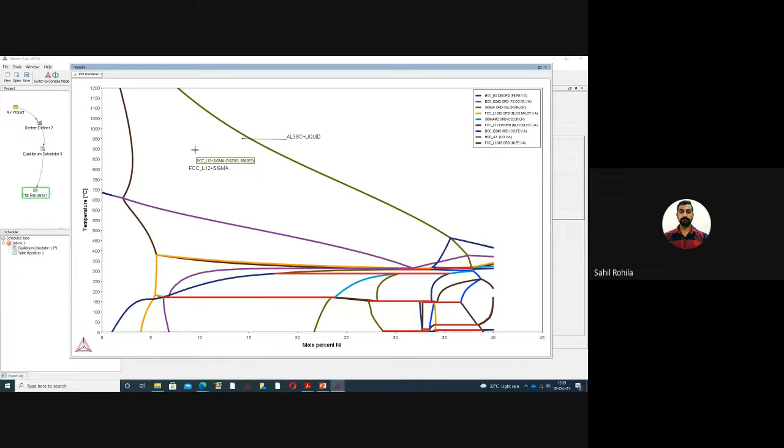Now the process completed normally. This is really good, right? So for this particular alloy, between 0 degree centigrade to 1200 degree centigrade, this is the phase diagram that we have obtained. If we want to check this region, just hover over it and it will provide the value of the phase, that is FCC plus sigma. If I right click, add label, the label will be added. I can save this phase diagram, which is one of the most important parts of thermodynamic calculation. Just save as a PNG, JPG, or TIFF format, or PDF format. I can directly save the phase diagram and use it later.

So if anyone has any question, let me know, because if I move into another domain, that is diffusion and precipitation, it will take another 15 to 20 minutes. The phase diagrams, this binary and ternary calculation, can be done through phase diagram only. I can show you here. So at the tab level, vertex scaling, show triangular. If I put it to triangular, I'll get the ternary phase diagram type. Perform. And here are the results.

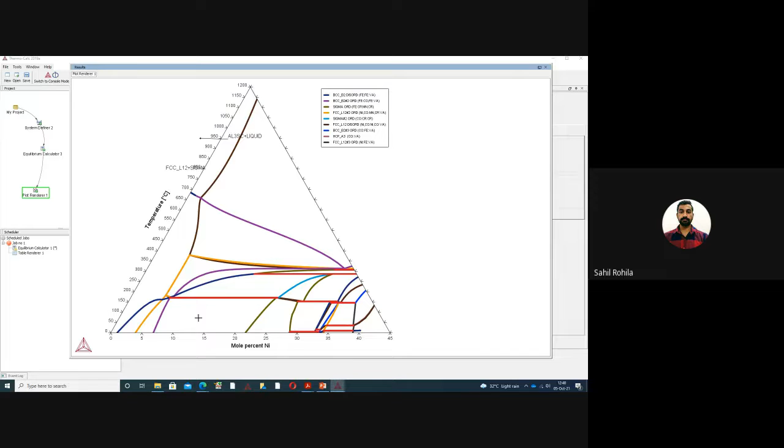So these are the binary and ternary calculations which I have covered. What all have I covered? I have covered the single point equilibrium. From single point equilibrium, we can calculate exact functions such as enthalpy, entropy, solidus temperature, liquidus temperature, or specific heat. These are the things we can calculate from single point equilibrium. Property diagram is the amount of phase. I can show you in the phase diagram the main thing is how the phase will behave, how the phase will change with respect to temperature if I fix the composition. Binary and ternary calculations are part of phase diagrams only.

I have shown you the end results. One more thing I can show you is the property diagram. Property diagrams in calculation are the 1D program, a one-dimensional program where the number of phases will change with respect to temperature. In phase diagram, it will show how the phase will change with respect to composition of any element and temperature. But property diagrams show how the phases will change with exact composition with respect to temperature.

For example, for fast calculation, I'll select iron and carbon, put 5%, steel database, equilibrium calculator. With respect to nickel, no, okay, database is steel. Actually property, yeah, this is the steel equilibrium calculator. Want temperature from 0 to 1500 degrees centigrade. Property diagram, plot renderer, automatic scaling of 0 to 1500 degrees centigrade, amount of phase per mole. Or I can, for example, select just the cementite phase to see how the cementite phase will behave. Perform.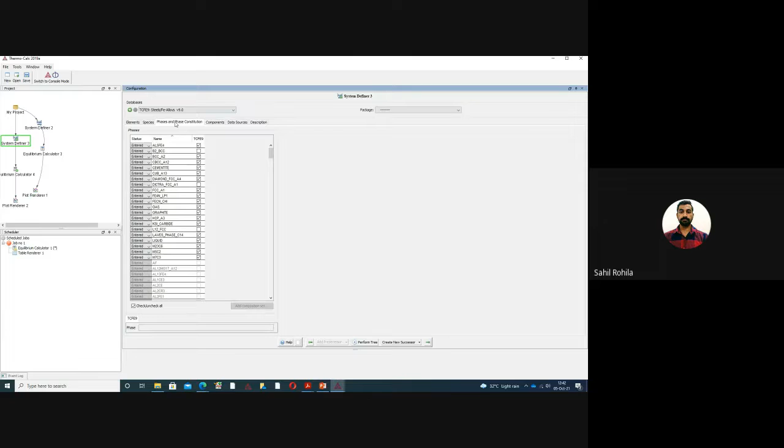We'll get the result within a minute because these are binary calculations. So it is not providing any cementite. If we can see here, it is not cementite, because cementite in general, actually graphite has a lower Gibbs free energy than cementite.

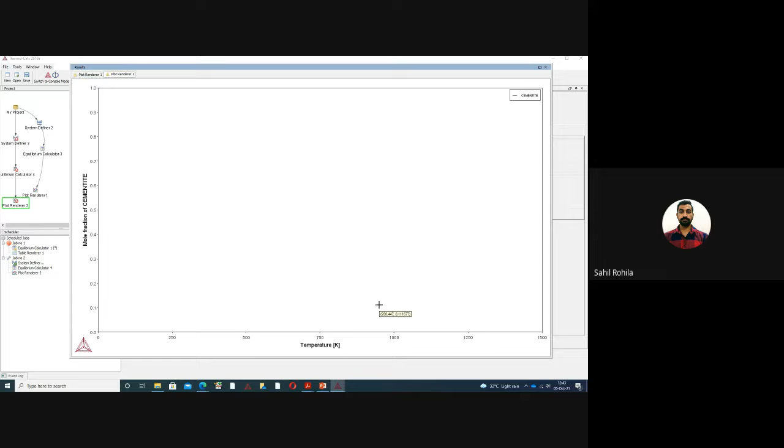So if we want cementite, we always have to uncheck graphite. Perform. Still we are not getting it. Okay, all phases, perform. Here are all the possible phases, and cementite is in this region. Properties.

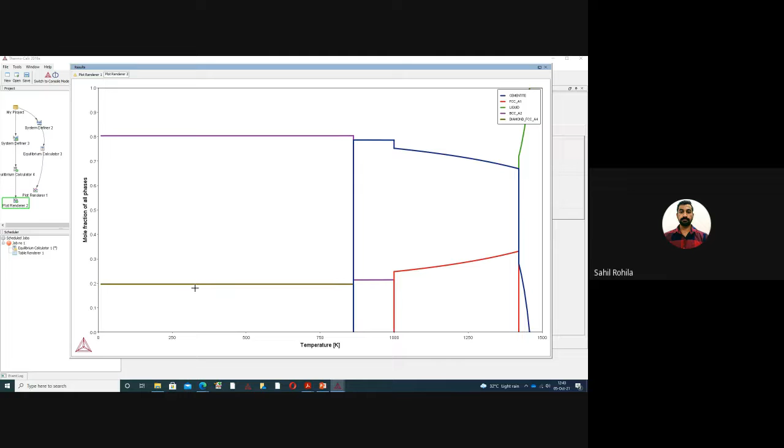This is the cementite line, suddenly at this point. These are the iron and carbon diagrams in which the composition of carbon and iron are fixed, but it will just tell us the mole fraction of the phases: this phase is BCC, which will have 80%, and the other phase is diamond FCC, which will be nearly 20%, till 0 degrees centigrade to 860 degrees centigrade. At 860 degrees centigrade, cementite will form, composed of nearly 78%, and the other phase will be BCC, of 20%.

This is how we can obtain the data of phases of a particular fixed composition with respect to temperature. So the modules that we have covered today are single point equilibrium, property diagram, phase diagram, and binary and ternary calculations.

The other modules are solidification, where we get the solidification curve, diffusion simulation, and precipitation simulation. Scheil solidification I can also show you within a minute. Scheil solidification actually uses the same assumptions as the Scheil equation and the solidification equation used for solute redistribution. So the assumptions it makes are that diffusion should not be there in the solid state, solid phase, and infinitely fast diffusion will be there in the liquid phase.

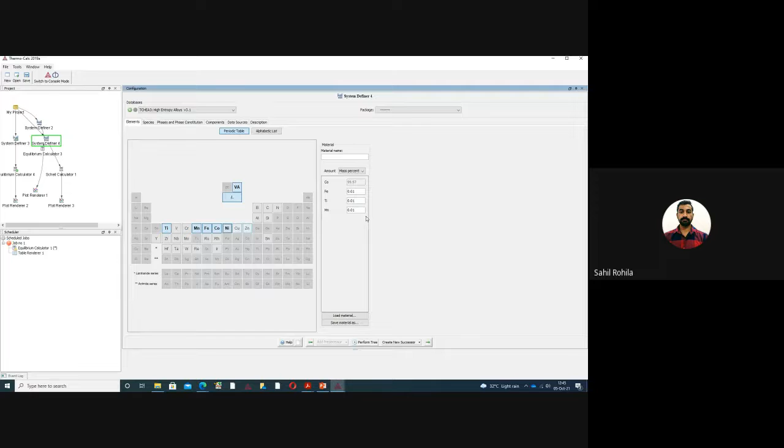So we can use this for high entropy alloys. For example, I have a high entropy alloy: cobalt, iron, titanium, manganese, nickel. I want 20, 20, 20, 20. And next, I'll just check if nickel is the fast diffuser.

I'll check that nickel is the fast diffuser. I'll select the starting temperature to be 1800 degrees centigrade. I'll select Celsius for temperature. I'll keep this normal and perform.

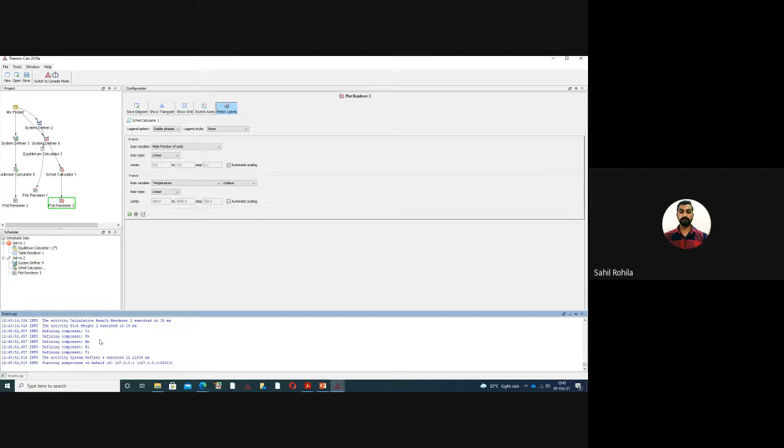Within 5 minutes, I'll obtain the solidification curve. For example, I have an alloy, and I want to see, for the melting and casting route, how that alloy is solidifying. I want to check which phase is precipitating first. For example, there's laminar flow and so many other things to control, but we'll get to know. Degrees of freedom: 0.

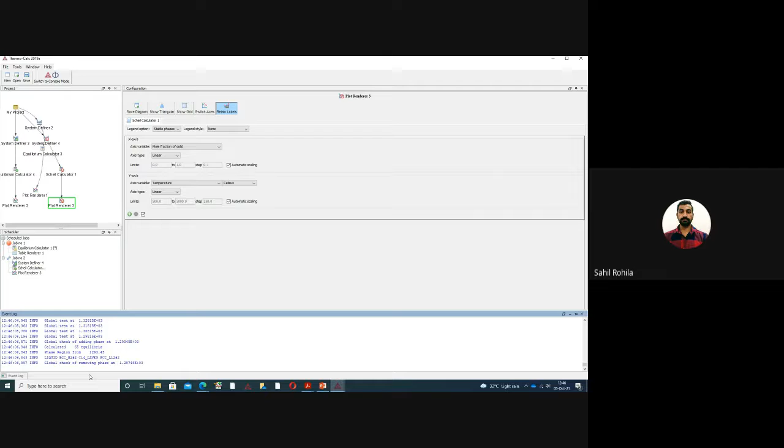Just 2 more minutes, I think, and we'll be able to get the results.

So earlier, as we obtained this property diagram, it told us that the liquid is the green line, and above this temperature, above 1423 degrees centigrade, our phase will completely transform into liquid. So Scheil solidification is a reverse of the property diagram: it will start from liquid, and then the first phase which will crystallize is cementite and FCC. So if I reverse this property diagram, I'll get the Scheil solidification.

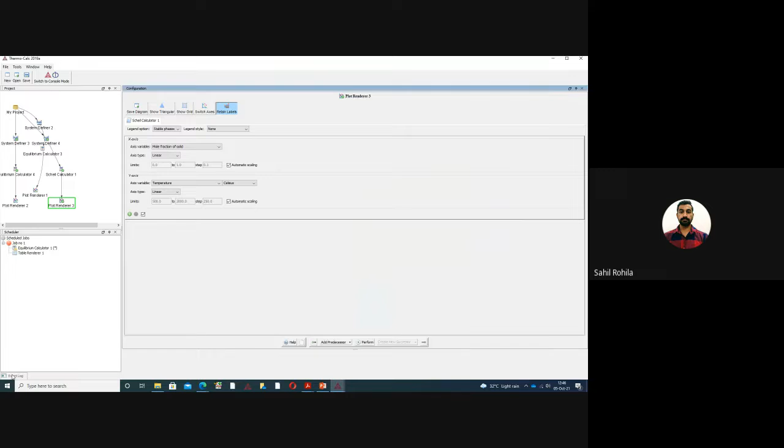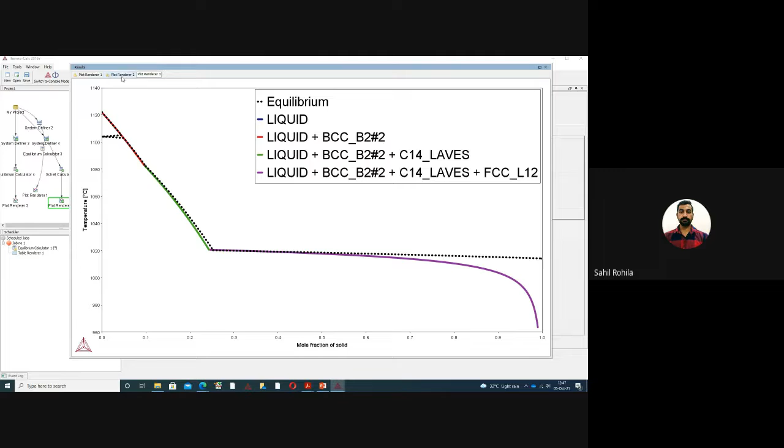Or if I want to do any quenching, then in that case the property diagram is very helpful. For selection of composition or stoichiometry, property diagrams and phase diagrams are helpful.